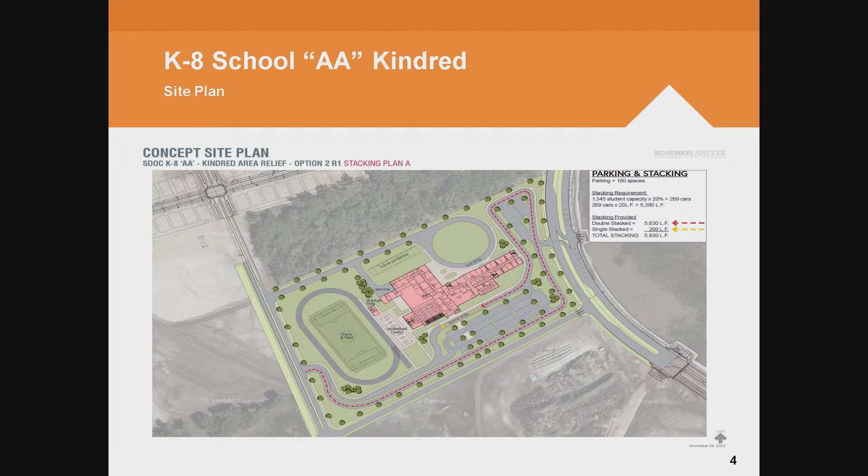Okay, but we'd like to move forward now and talk about the elevations. We have two choices. The rendering you see on screen is very similar to what was approved for Knightsbridge KA, by the same designer, Schenkel Shultz Architects. If you recall, Knightsbridge had the business focus, and we're also going to replicate the business focus at Kindred AA.

The second rendering starts on page 7, with two shots, pages 7 and 8. That is the second rendering provided by our architect. So the first one is very similar to what we're doing at Knightsbridge.

The second rendering's color scheme actually breaks up by grade sections, so even from the outside you can tell which grade wing is which technically. So it helps, and if you notice, they carry that through.

Does it provide a security risk? I mean, unless... Not really, it's not safe, it's just something that we share with the community, as with our floor plans.

In fact, we're going to talk about a floor plan for St. Cloud High School. We're not allowed to share any of that information with the community, so no, we will not share those floor plans or color schemes.

But the architect also pointed out and wanted me to share that the thought process here was book stacking, as in the library, that's why you have the slanted patterns with it. The second one is very colorful, playful, intended to excite the students to come to their new school. You see the name of it predominantly too.

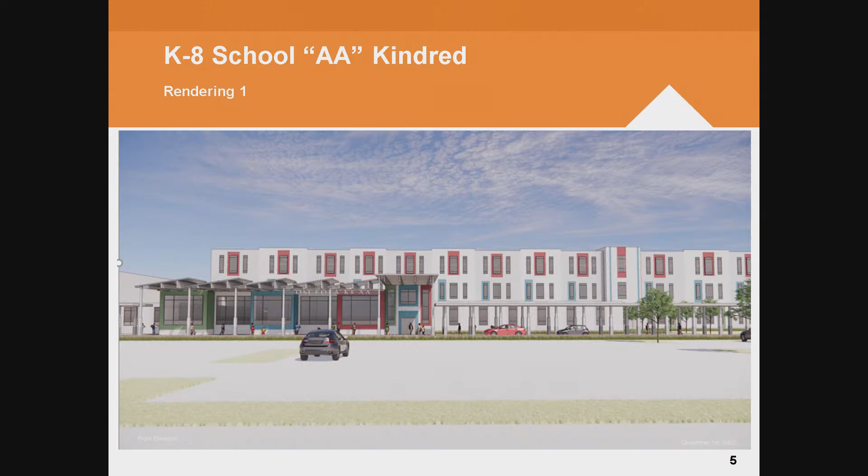Okay, well moving on. Our next school elevation we'd like to talk about is Roan Bridge DD. This is our Ziskovich design, very similar to what we're doing at Sunbridge KA and what we previously did at Canoe Creek KA. It also has the E-STEM focus. Dave, I'll let you talk about the site plan. Thank you, sir. So, similar approach, this school is located off of 19th Street and the future extension of Orange Avenue, on that corner.

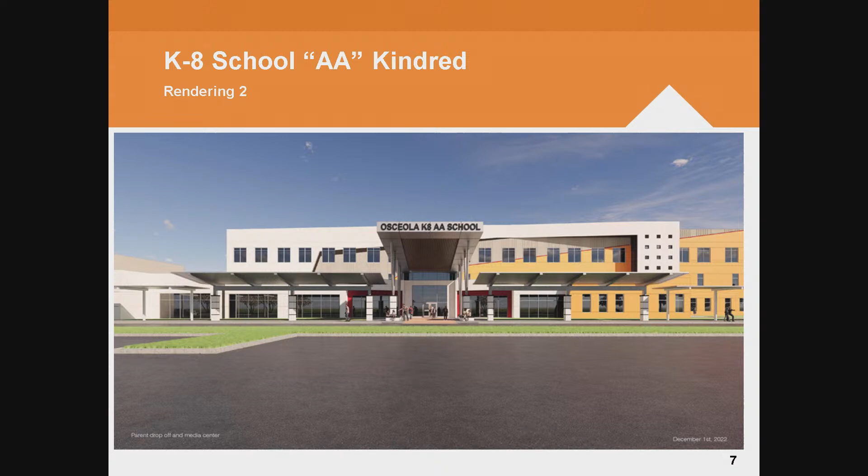The bus loop and parent loop are separate. Same concept, we try to keep as much stacking as we can on site. We do have 20%. We kept the parking separate so someone can leave during parking and stacking. We actually were able to pick up more staff parking in this one off the bus loop, which would allow our staff to leave on time.

The site allowed us to have a future use park, a community park, to the bottom of your page. That's similar to Sunbridge as well. As Mr. Glynn said, this one is unique. We test fitted all of our prototypes, and this one worked best here. It has a separate classroom building and a gymnasium, as Sunbridge is going to be.

Okay, well now, yeah, I appreciate that one. I want to see what the city plans to do in the southern part of that, because I like that idea of co-locating a city park or something like that.

To the bottom of your page is our future developments, and we have catered - you'll notice the yellow line, that's actually sidewalks so walkers can walk through and get to school. We don't have an agreement or anything like that by any means, but it is going to be sort of a play area.

The reason for that is, see how the car rider loop kind of does a cul-de-sac? But if we know they're planning to do something there, and if they're not going to have a third entrance, maybe we can have it turn quicker and leave it open so they can connect the road. So if somebody's driving to the parking lot of the public park, they have another way to get in and out. Does that make sense? Like if it went straight that way and then connected up this way - you could turn left but also go straight, because if this is going to be a park here, they can get access to that.

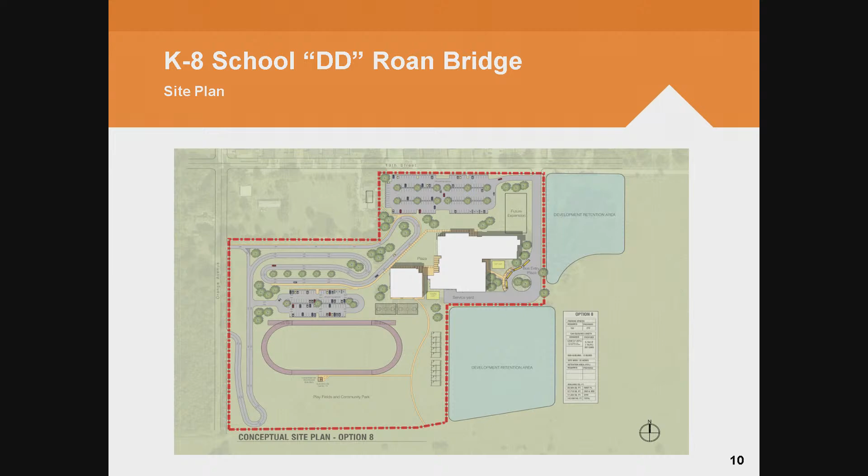Yes, understood, we'll research that. That's a great suggestion. Rendering, I'm good with too. I like the greens, I see them. I love that, and I know we met last week for over an hour.

On all of this, let's go through some of these questions. I appreciate your time with me.

A lot of these projects, not just in our district but moving forward - I come from Canoe Creek K-8, so it ties right into the theme of drawing folks to these schools. I like the second option, with various shades of green that tie into the sustainability, environmentalism, and E-STEM theme we're trying to bring into the school.

We did lower the front canopy as well, Mr. Menendez. And actually, that first elevation is very similar to what we already did at Sunbridge, so Sunbridge is going to look very similar to the first one.

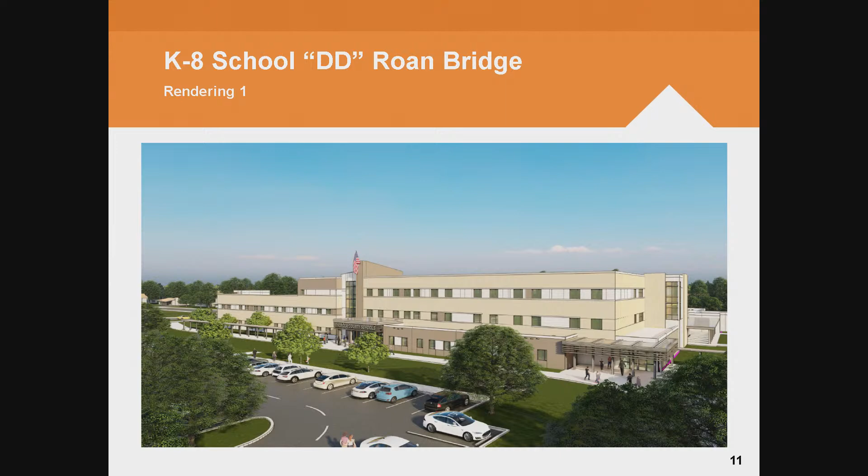We'll move to our next project, and that is Transportation West. So we had previously talked about Transportation East, and we have the elevations approved for it.

Let's talk a little bit about the site plan. This is a more challenging site, given the size of the wetlands we have on the site. What we're envisioning is a land bridge that would go from the first bus parking area to a second supplemental bus parking area, and we would have our fueling island out there as well.

But Dave, I'll let you talk about the intricacies of the site. That bad, huh? It is. So this site is off of Robert McLean Boulevard, at the end of it, and so we have to build a new road to get into the site.

The timeline sort of drove this site plan, because mitigation of the wetlands would not allow us to open this facility on the timeline transportation needs. And remember, the need for this site is actually way more than Transportation East - we were just able to pull the trigger on that faster. So what we did was try to limit the amount of wetland impacts, and this was the best that we could come up with.

So we got a similar program capacity at this site as we did at East, in terms of the amount of bus parking, staff parking, the same bus wash, fuel islands, and stuff like that - but we just had to spread it out this way.

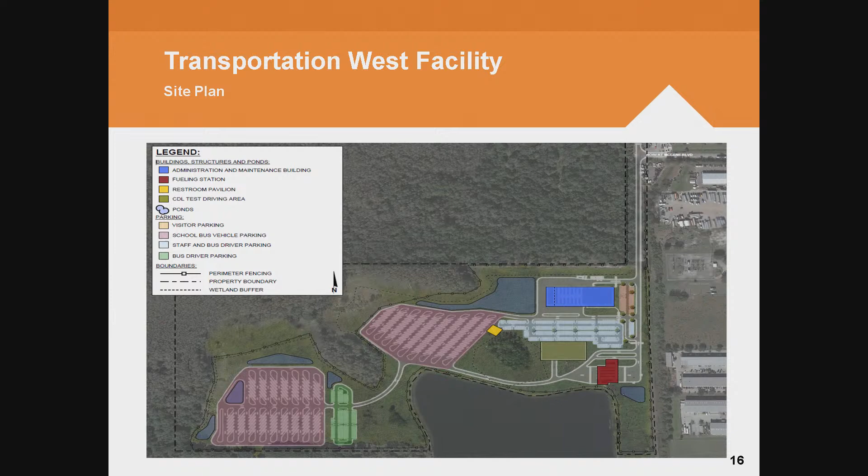The other thing we spoke about before, because the shape of it is a little bit off, but because of where it's located, not near residential, I was thinking about maybe putting a cell phone tower, because that generates significant revenue for us, for scholarships and things like that. I know it's not really facilities related, but since it was oddly shaped, I thought it would be nice to carve out a spot for a cell phone tower.

If there is a site that I would nod positively and say that's where you put a cell phone tower, it would be a site that doesn't have students. So this would be correct. So if we can look at possibly fitting it in there, because we don't have to build it ourselves, we sublease it out to somebody and just collect the royalties.

We can reach out to our cell tower providers and see if they require coverage in this particular area. Another thing that's key to cell towers is them having their own access, because they're in and out quite often adding additional customers to those towers. They're changing to small cell now too, so there's not gonna be that many, not a lot of big towers coming. But we could look at whatever they need. The point is, I think there's some spots there - a spot here, a spot there in the corner.

One of the reasons we ended up with this shape was trying to balance the wetlands, but we also tried to limit the amount of fill we'd have to bring onto the site and still stay out of our floodplains. That drove it as a cost-cutting measure, trying to reduce the amount of fill. At the end of this presentation, if we make it that far, we'll talk about the cost impacts we're seeing from site work. So we were trying to limit that as well, and that's what drove us here.

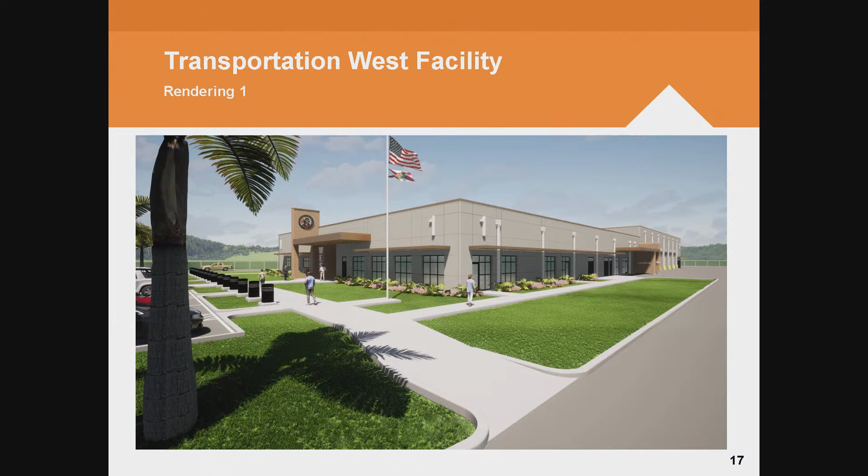So our elevations, again, two choices. The first three slides are rendering 1, and this is hard to see between 1 and 2, but rendering 1 is more of the gray tones, just like what we had approved for Transportation West. There's the second slide, and then the third, more of the gray tones. Rendering 2 is more of the earth tones, brownie type.

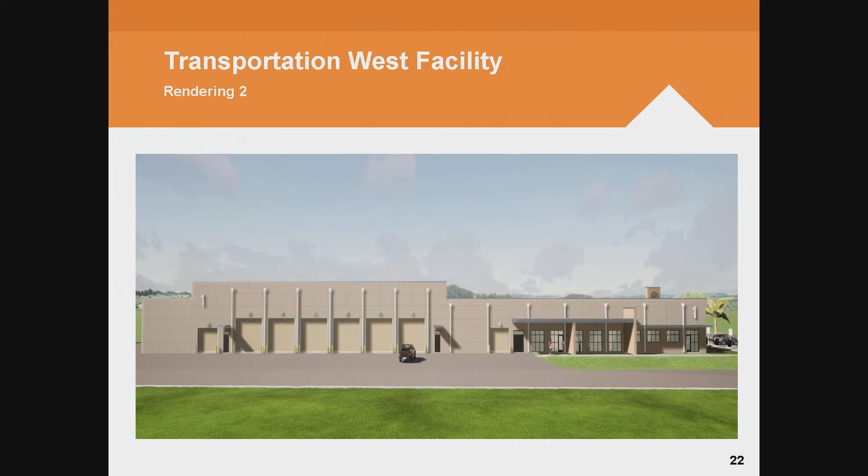So the difference is that the guy's wearing jeans in one and he's wearing khakis in the other. The first color is the earth tones, which is very similar to Transportation East - that's actually what was approved for it. For Transportation West, there's not much you can do with a building like this, other than using different paint schemes, in an attempt to keep it similar but trying to bring some variation.

Is there a reason why they need to be different? No, they could be the same color. We could do the same color as Transportation East - you could save the ink, right? And we could front load that, buy a bunch of ink, right? And have to buy - I mean, not ink, I mean...

It doesn't save a lot of money, but we have to provide some attic stock for touch-up painting anyway, so that way we wouldn't have to match too many other colors for maintenance purposes. Makes sense to standardize this. I'm a big proponent.

Do we want to go with the same color palette as Transportation East, or the first one? The first one, all right, so be it.

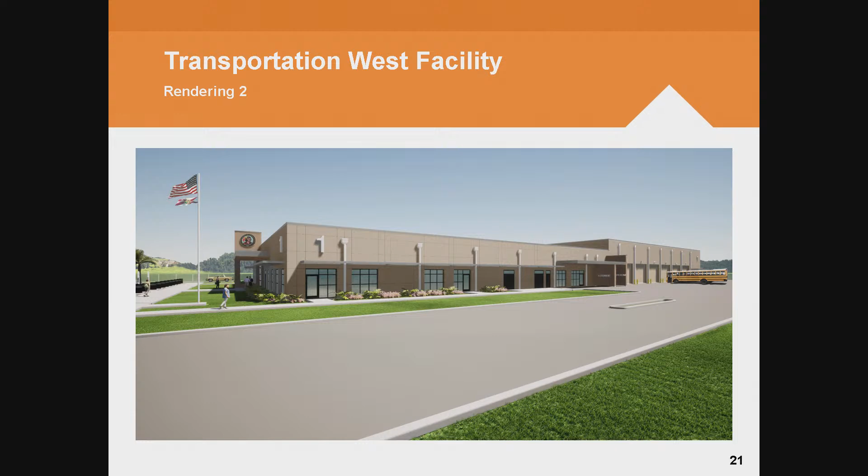Thank you. All right, we'll move on to our next item. This is for our St. Cloud High School wing addition.

The need came to us to provide additional student stations at this campus. The challenge was that typically when we add additional student stations, we try to do the two-story prototype building you've seen at many locations throughout our campus. However, we couldn't site that on the main part of the campus. We have property on the other side of the football field, but the walk between classrooms would have been a minute plus, so that wouldn't have worked. So we came up with a creative solution to do a wing addition off of Classroom Building 3.

Initially, we had contemplated doing two additions off of Building 3 because it's a U-shaped building. However, working with our designer, CT Hsu, we were able to do one wing addition, so it keeps all the construction a little more contained and helps keep our cost better in line.

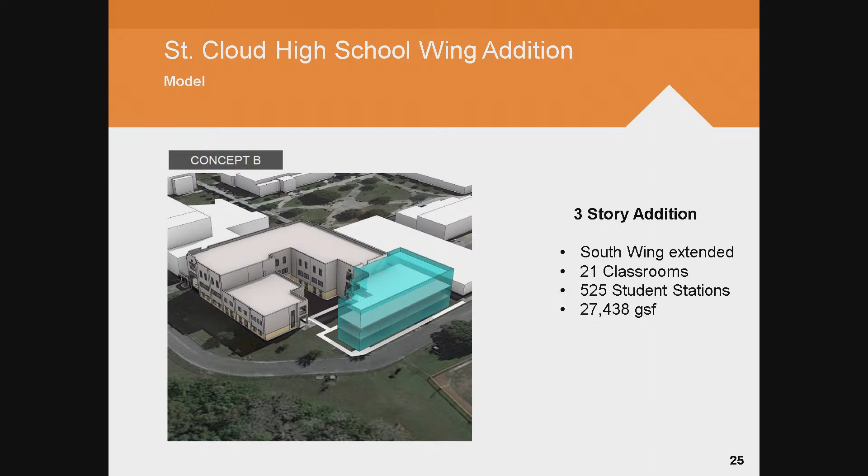So if we say yes today, that input session is done, right? There's no changing of scope after that. Correct — we go forward, the program verification is done and locked in. We're now in production design.

But we do need to talk about the budget. The initial minimal scope that was contemplated got us to a total project budget of 10.6. The additional spaces, the additional square footage, and some additional escalation we've seen since the project was initially budgeted is now estimated at 14,177. So part of our ask today is to amend this project budget to 14,177.

Is this just based on cost escalation? Cost escalation was a big item. We had carried a cost escalation factor with this budget, as we did our other budgets, and it just wasn't enough to keep up with the escalation we've seen in the market. And then the other part is the additional square footage — the 2 additional classrooms, the 3 dean's offices with adjoining conference rooms.

Will we be able to get rid of the portables then? Yes. So we can save money on the expense of maintaining 5 portables, I believe, plus 1 or 2 restroom portables in the parking lot, and there are 4 in the back as well. We would look to get rid of all those portables, which are currently leased, so we'd just cancel the lease and save that money.

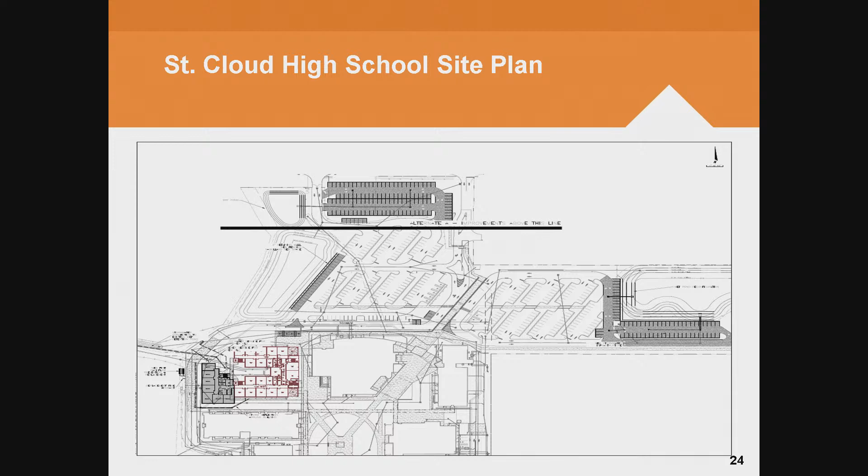One more question about the cost or the bids. So they're locked in, right? I know we had this conversation with Gateway where folks gave us a price and then when they started production it was different. So is there wiggle room for them to add or take away based on material costs?

So if we've already been out to bid, we're in the GMP negotiation process. Correct. Yes, sir. We haven't negotiated the final amount yet, so we can look at that and see if we can bring that into the project, if there is room. Or during the course of the project, that might be another option as we work through buyout savings, unused contingency. So this is the GMP right here you're giving me? It is the guaranteed maximum price. It is based on the bids that we got, yes, ma'am.

We are still finalizing that to get to, hopefully, the second board meeting in February. We're looking to bring the GMP before the board. So to answer your question, based on the way we go to contract under guaranteed maximum price contracts, if there are true justified cost increases by the time we actually cut a subcontractor, there typically isn't much we can do because they still have the option of walking away. We don't expect that though.

So I guess, is there consensus then for the parking lot? Because I heard a little bit of both. Are we going ahead with the 646 or not? I think we can add that to another project later. So we just leave it blank right now, don't put anything? Correct, just leave it as is, and then look at it later as a future option, depending on how we do with the GMP negotiations, buyout savings, et cetera, or as a separate project at a later date.

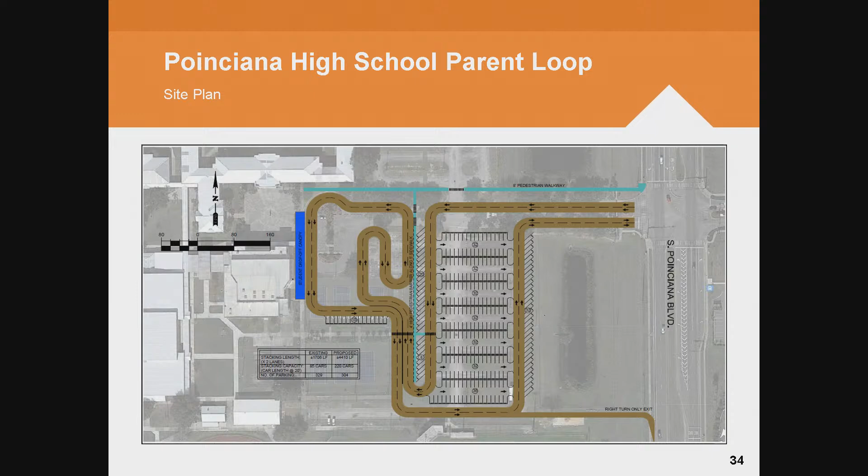So we are requesting to add in the construction piece, to fund the construction, and to get us to a 2.924 project budget.

Okay, moving along, our Kissimmee Middle School network cabling project. We've been working very closely with our IT department. Mr. Thorne is here to answer any questions. Initially this project was envisioned to be somewhere around $750,000. But when the IT department got deeper into the project and determined the true cabling needs, as well as replacing several servers, and air conditioning being added to various MDF and IDF rooms, based on that scope we're requesting to bring this project budget to 1.170.

Why didn't you originally seek counsel with the IT department when you were building this budget? The IT department assigned the budget based on a scope of what they envisioned was needed at the school at the time. Typical cost escalations, equipment cost escalations. And in the interim, we decided to connect Kissimmee Middle and Kissimmee Elementary together on one circuit, so that's also part of it, although it's a small piece of the monthly increase. We'll be generating some savings from that by eliminating devices and other connections we need for our electric. So you just added to the scope.